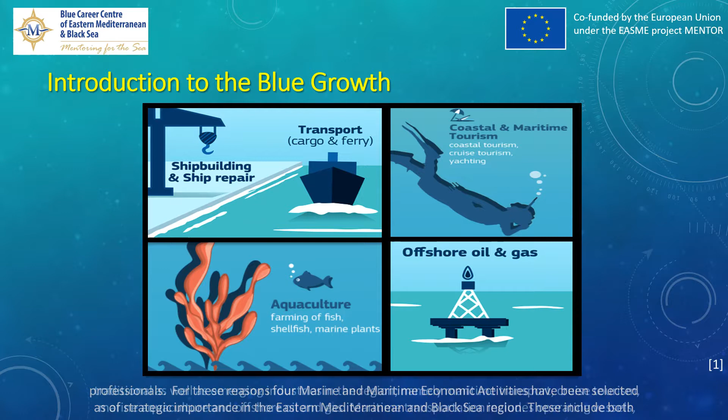For these reasons, 4 marine and maritime economic activities have been selected as of strategic importance in the Eastern Mediterranean and Black Sea region. These include both traditional as well as emerging industries in the region, namely maritime transport, cruise tourism, marine aquaculture, and offshore oil and gas.

Maritime transportation includes operating vessels, shipbuilding and ship repair. Cruise tourism industry consists of cruise lines, travel agents, key suppliers and cruise line partners including ports.

Marine aquaculture refers to the culturing of species that live in the ocean. We consider marine aquaculture that takes place in the ocean, that is in cages, on the seafloor, or suspended in the water column. Finally, the offshore oil and gas industry refers to the development of oil fields and natural gas deposits under the ocean. The majority of oil and gas production in Europe takes place offshore.

As a result, the European-funded Project Mentor is focused on these 4 main sectors.

Oil and natural gas form as the result of the decay of marine organisms on the ocean floor. Sediments, for example clay and mud, are deposited on top of the organic matter, creating anoxic conditions that prevent decomposition. As a result of burial and compaction, the organic material becomes heated and hydrocarbons are formed.

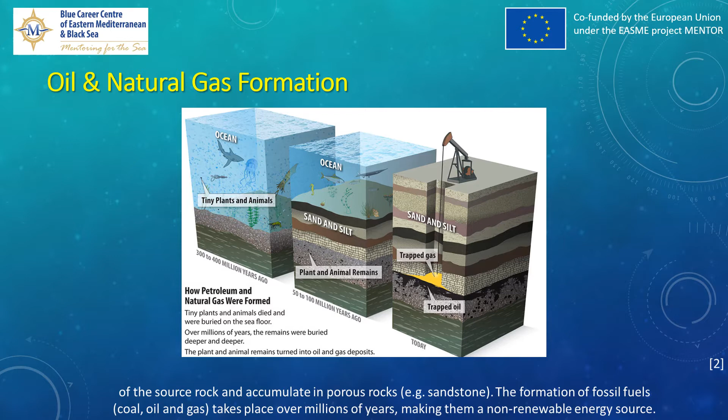The hydrocarbons form oil and gas, which are forced out of the source rock and accumulate in porous rocks, for example sandstone. The formation of fossil fuels, coal, oil, and gas, takes place over millions of years, making them a non-renewable energy source. Globally, we consume 96 million barrels of oil every day. This is the same as 48 supertankers of oil every 24 hours.

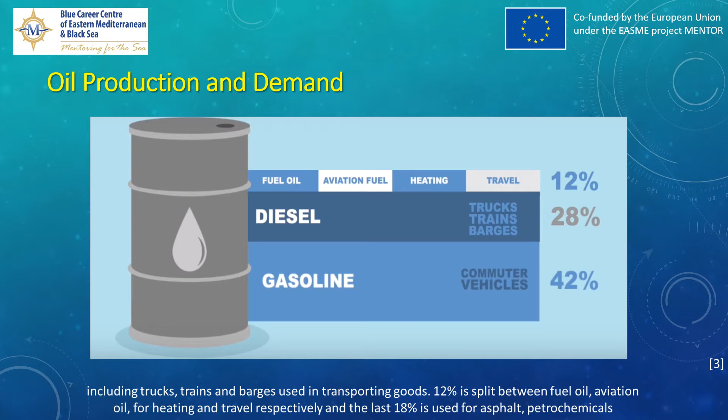So, what is all that oil used for? Well, we as consumers use almost all of it. If you take a barrel of oil, 42% of it will be turned into gasoline for our vehicles, 28% will be turned into diesel, which runs our commercial fleet including trucks, trains and barges used in transporting goods, 12% is split between fuel oil and aviation oil, for heating and travel respectively, and the last 18% is used for asphalt, petrochemicals and plastics.

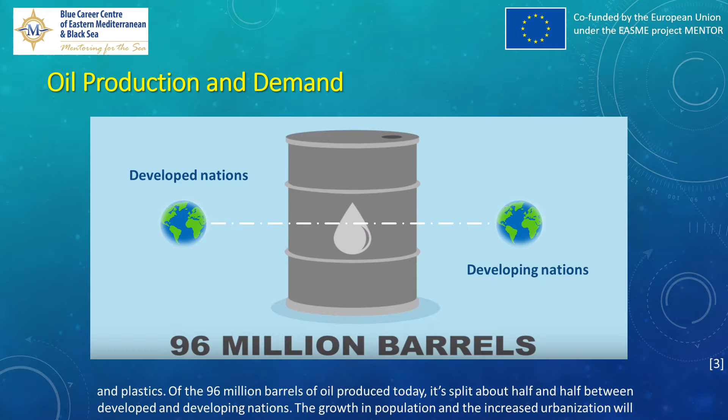Of the 96 million barrels of oil produced today, it's split about half and half between developed and developing nations. The growth in population and increased urbanization will outpace the electric car and energy efficiency for oil consumption, and as a result the global demand for oil will likely go up by another 18 million barrels per day until about 2040, where it is expected to level out and start to decline.

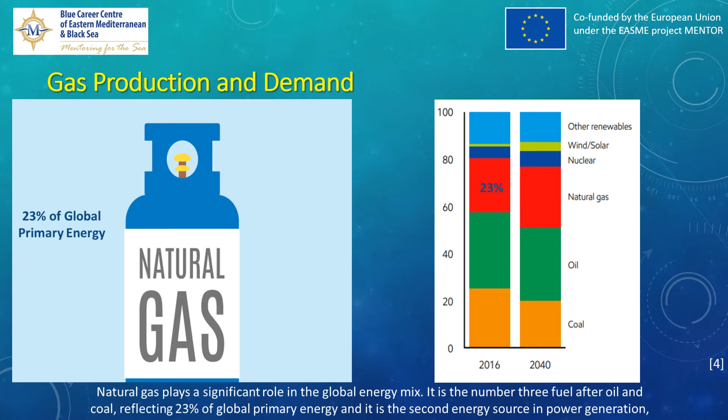Natural gas plays a significant role in the global energy mix. It is the number 3 fuel after oil and coal, reflecting 23% of global primary energy, and it is the second energy source in power generation, representing a 22% share. It is anticipated that in 2040 natural gas will be the second fuel in demand, and its share will be 26% of the energy supply mix.

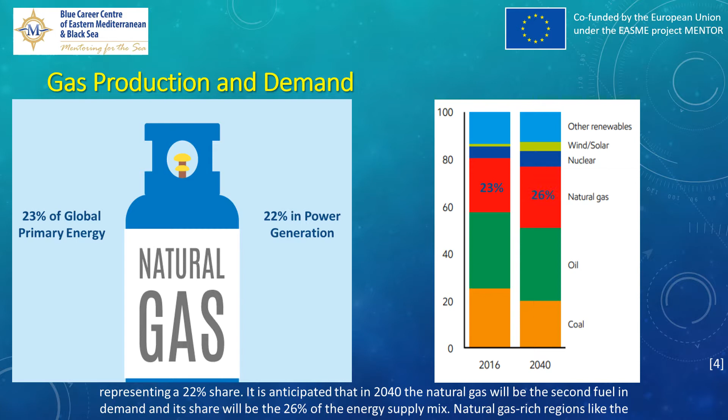Natural gas-rich regions like the Middle East and Russia-Caspian rely on natural gas to meet about half of their energy needs. Abundant unconventional resources prompt North America's steady shift toward natural gas. It also plays an important role in fueling economic growth in Asia, Africa and Latin America.

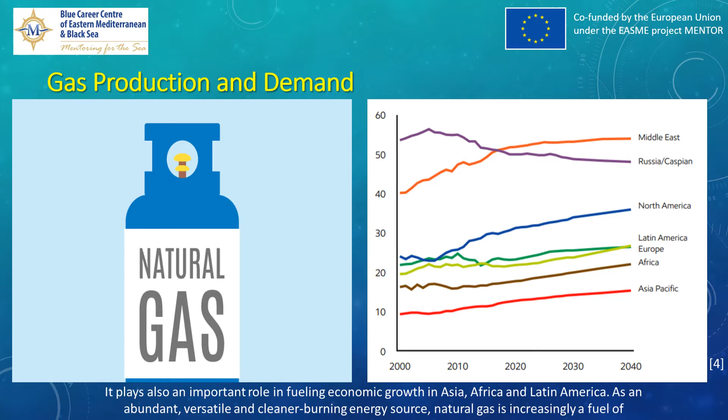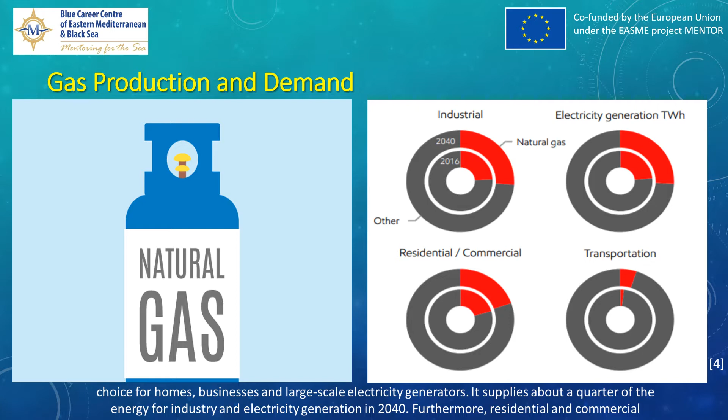As an abundant, versatile and cleaner-burning energy source, natural gas is increasingly a fuel of choice for homes, businesses and large-scale electricity generators. It supplies about a quarter of the energy for industry and electricity generation in 2040. Residential and commercial users continue to rely on natural gas as a convenient, modern fuel for heating and cooking. Finally, natural gas is a small fraction of transportation demand, but sees strong growth in the commercial road and marine sectors.

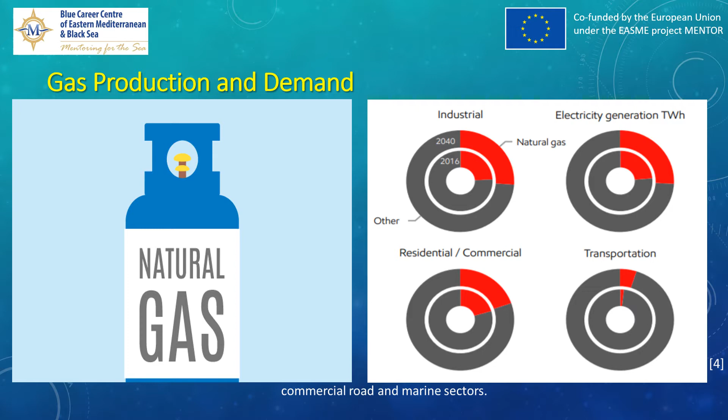The term offshore means off the coast. In oil and gas extraction, offshore refers to the development of oil fields and natural gas deposits under the ocean. Oil rigs are used for the offshore exploration and production of crude oil. Crude oil deposits in the ocean that permit underwater drilling and extraction are developed and exploited using oil rigs. The drilling platforms used for development are subsequently replaced in part by production platforms.

Offshore rigs are also used for the underwater exploration and production of natural gas. In order to develop and exploit natural gas deposits under the ocean, drilling platforms are erected and later in part replaced by production platforms. Offshore drilling began in 1897, just 38 years after Colonel Edwin Drake drilled the first well in 1859, and the first offshore platform was installed in 1947 near the coast of Louisiana in 6 meters depth of water.

Shallow water is defined as water depths up to 305 meters. Deep water is defined as water depth from 305 meters up to 1,524 meters, and ultra-deep water is defined as water depths more than 1,524 meters. The Golden Triangle, Gulf of Mexico, Brazil, and West Africa, is home to primary deep water operations.

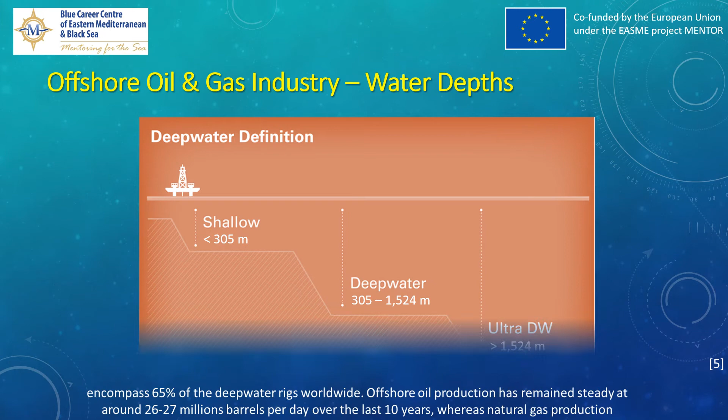In recent years, activity has also expanded to the North Sea. These 4 areas encompass 65% of the deepwater rigs worldwide.

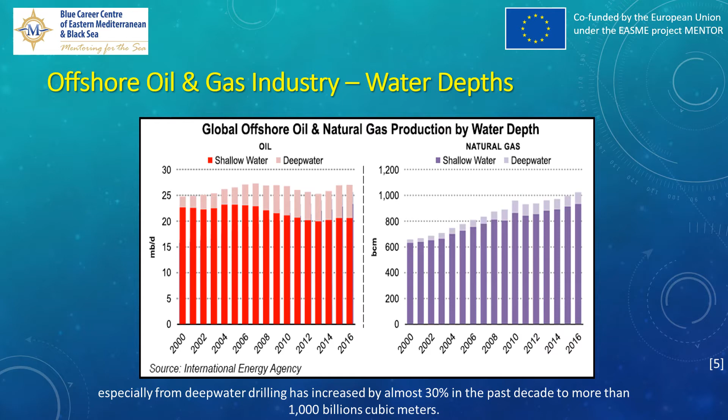Offshore oil production has remained steady at around 26 to 27 million barrels per day over the last 10 years, whereas natural gas production, especially from deepwater drilling, has increased by almost 30% in the past decade to more than 1,000 billion cubic meters.

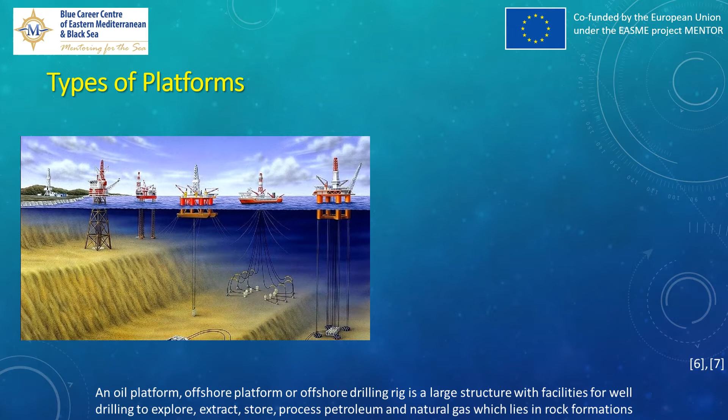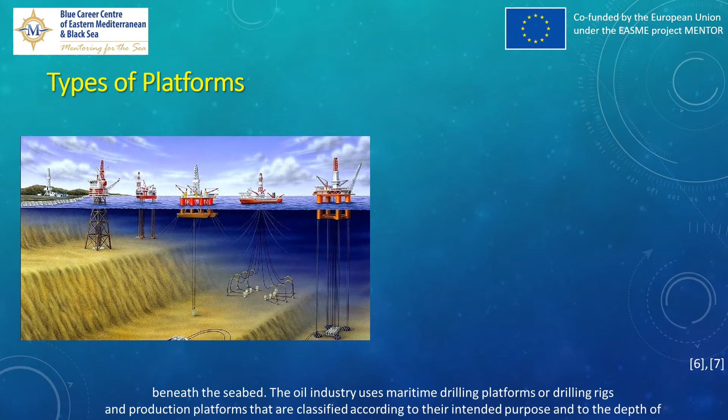An oil platform, offshore platform, or offshore drilling rig is a large structure with facilities for well drilling to explore, extract, store, process petroleum and natural gas which lies in rock formations beneath the seabed. The oil industry uses maritime drilling platforms or drilling rigs and production platforms that are classified according to their intended purpose and to the depth of the water in which they can function. The major types of offshore oil rigs include the following.

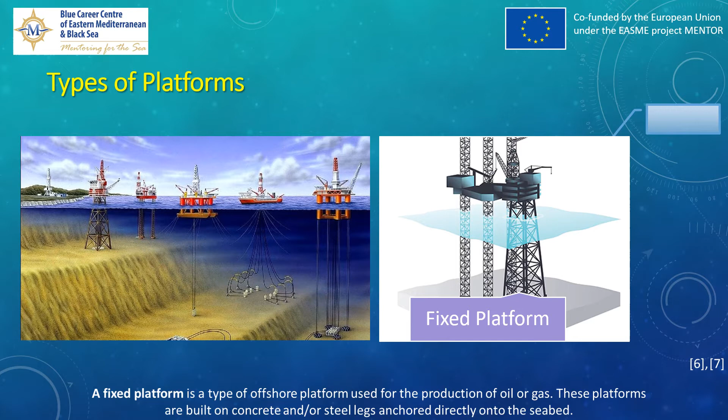A fixed platform is a type of offshore platform used for the production of oil or gas. These platforms are built on concrete and/or steel legs anchored directly onto the seabed. Fixed platforms are economically feasible for installation in water depths up to about 300 meters.

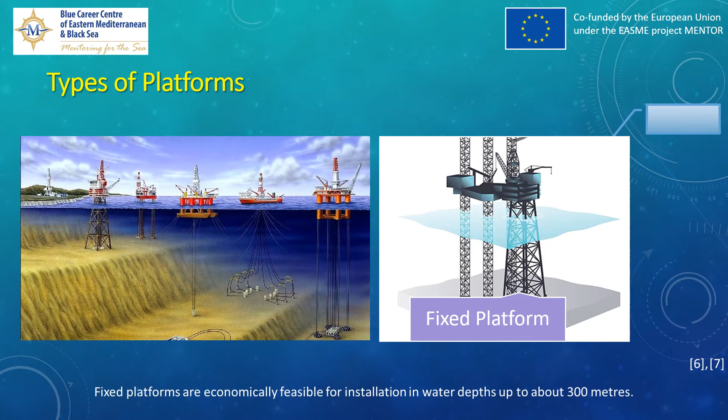A jackup rig is a barge fitted with long support legs that can be raised or lowered. The jackup is maneuvered self-propelled or by towing into location with its legs up and the hull floating on the water. Jackup rigs can only be placed in relatively shallow waters, generally less than 120 meters. In some special cases their operational capability may reach up to 190 meters.

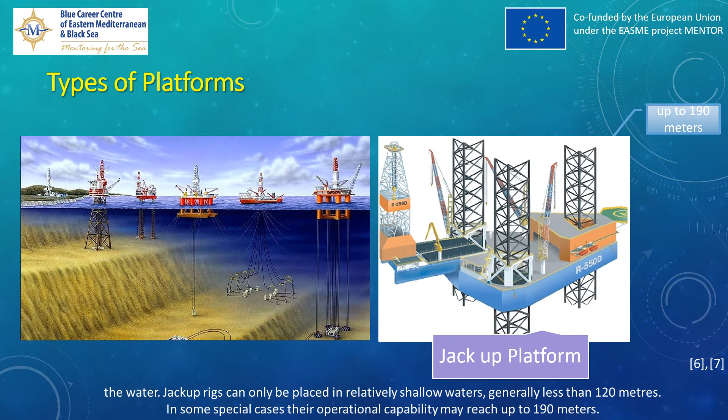Compliant towers consist of slender, flexible towers and a pile foundation supporting a conventional deck for drilling and production operations. Compliant towers are designed to sustain significant lateral deflections and forces, and are typically used in water depth ranging from 370 to 900 meters.

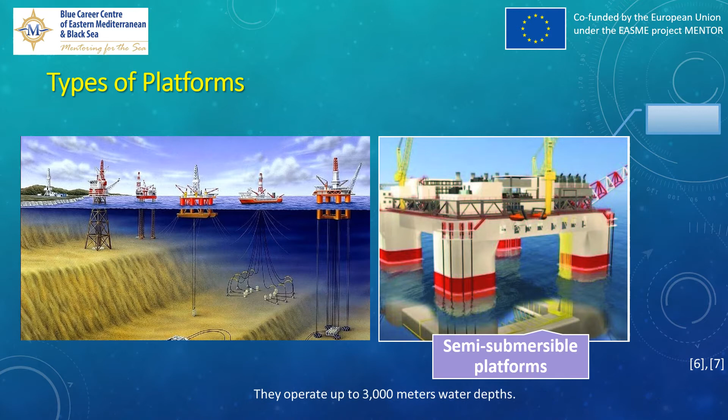Semi-submersible platforms are floating units widely used both in the drilling and the production. Its structure can include one or more decks, which are supported by columns or legs on pontoons. They operate up to 3,000 meters water depths.

Tension leg platforms are an evolution in the concept of semi-subs. The main conception behind its construction is the use of legs as a base, which are secured to the seabed with tethers tensioned in the platform and connected to the legs. These platforms are particularly suited for water depths greater than 300 meters and less than 1,500 meters.

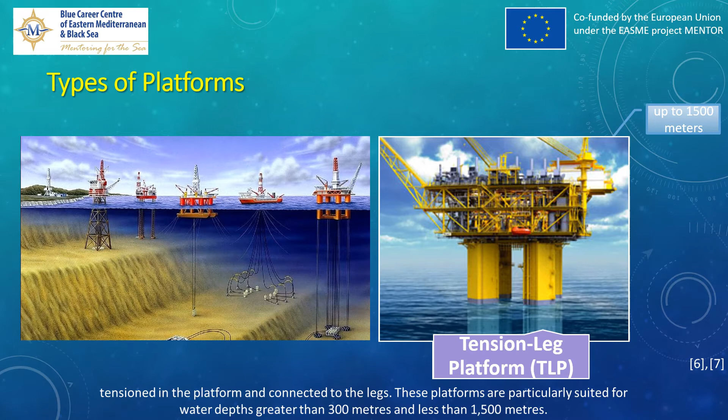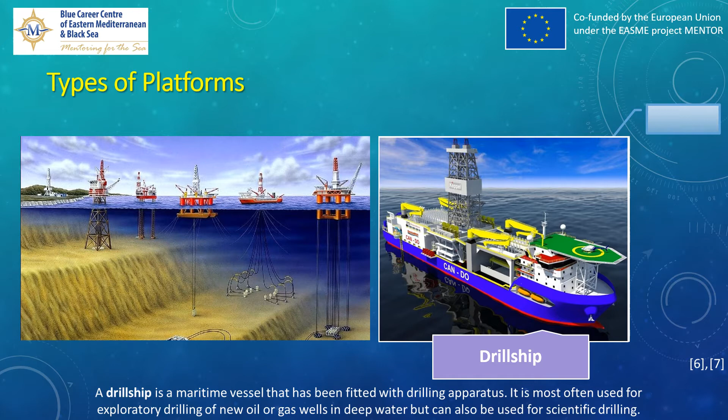A drillship is a maritime vessel that has been fitted with drilling apparatus. It is most often used for exploratory drilling of new oil or gas wells in deep water but can also be used for scientific drilling. Early versions were built on a modified tanker hull, but purpose-built designs are used today. Most drillships are outfitted with a dynamic positioning system to maintain position over the well. They can drill in water depths up to

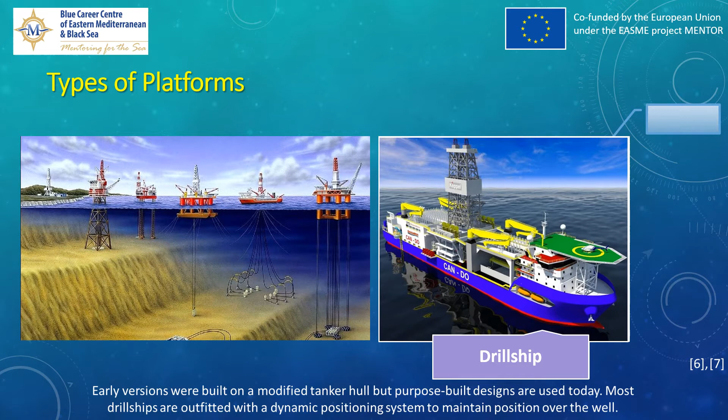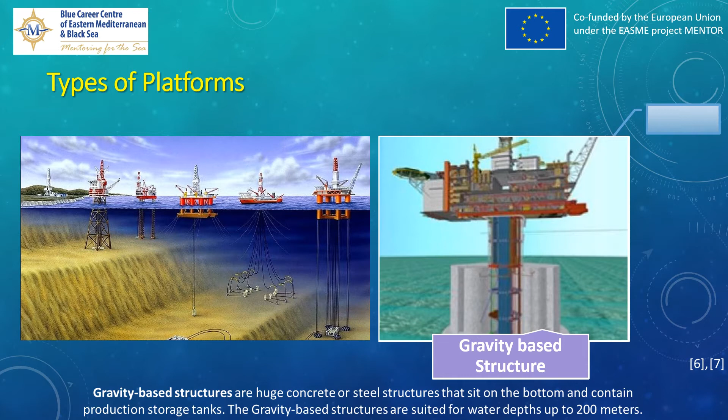3,650 meters. Gravity-based structures are huge concrete or steel structures that sit on the bottom and contain production storage tanks. The gravity-based structures are suited for water depths up to 200 meters.

For drilling wells up to 3,000 meters, naval architects have designed a type of drilling and production platform which has a hollow cylindrical hull that can descend up to a sea depth of 200 meters. These are called spar platforms. This type of platform is secured to the ocean floor by a complex network of cables and tendons.

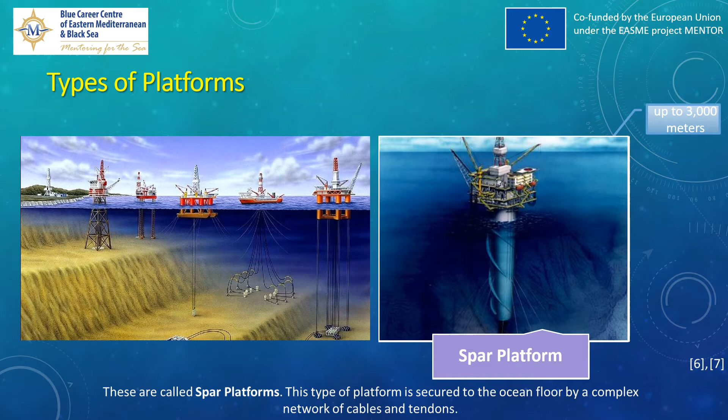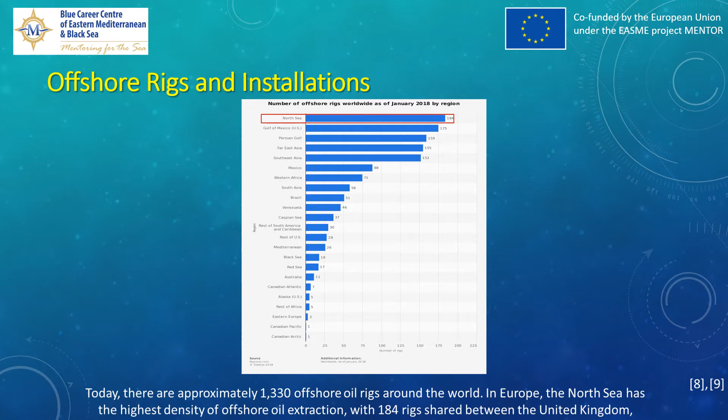Today, there are approximately 1,330 offshore oil rigs around the world. In Europe, the North Sea has the highest density of offshore oil extraction, with 184 rigs shared between the United Kingdom, Germany, Denmark and Norway.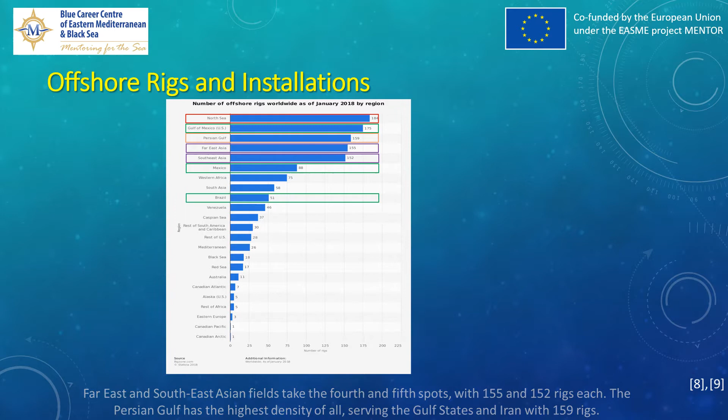Currently there are more than 600 platforms, not counting the large number of subsea structures connected to them, operating in the continental shelves of the European member states. In the North Sea, hydrocarbon offshore production takes place in the Danish, Dutch, German, Irish, Norwegian and UK sections.

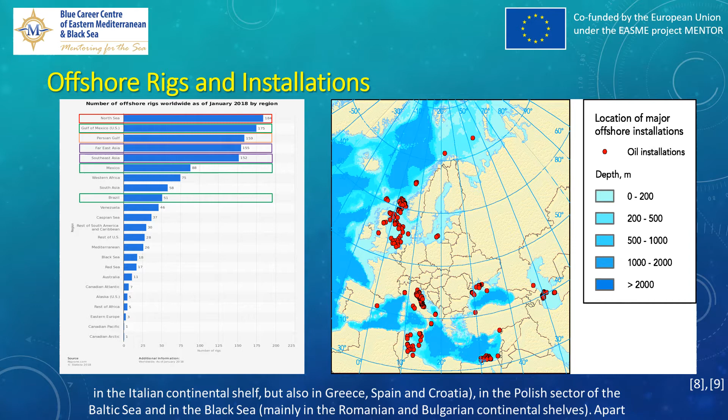Offshore production is also taking place in the Mediterranean, mainly in the Italian continental shelf, but also in Greece, Spain and Croatia, in the Polish sector of the Baltic Sea, and in the Black Sea, mainly in the Romanian and Bulgarian continental shelves.

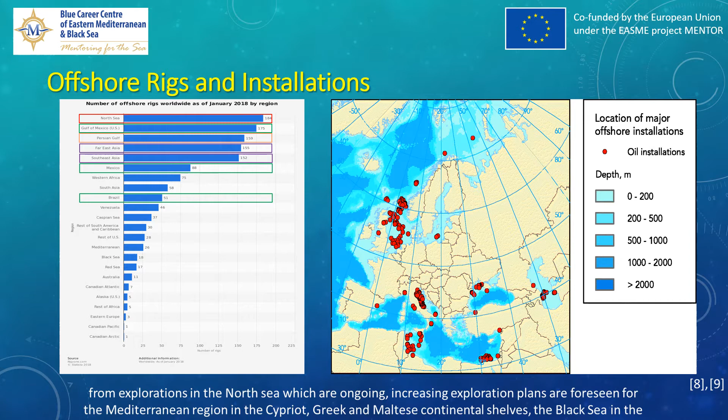Apart from explorations in the North Sea which are ongoing, increasing exploration plans are foreseen for the Mediterranean region in the Cypriot, Greek and Maltese continental shelves, the Black Sea in the Bulgarian and Romanian continental shelves, as well as for the Atlantic east coast in the Portuguese continental shelf.

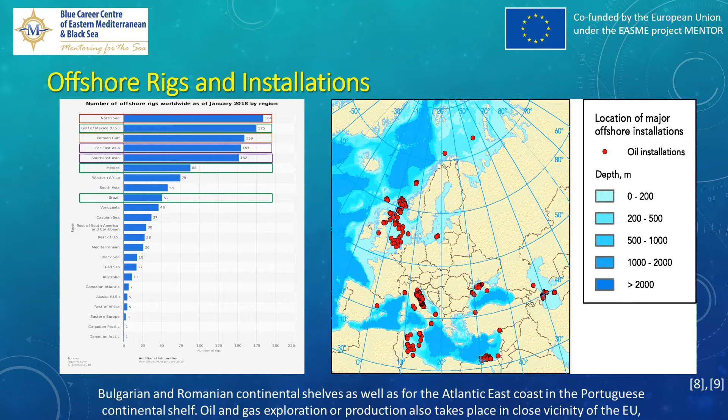Oil and gas exploration or production also takes place in close vicinity of the EU, off the coasts of Algeria, Egypt, Israel, Libya, Tunisia, Turkey and Ukraine.

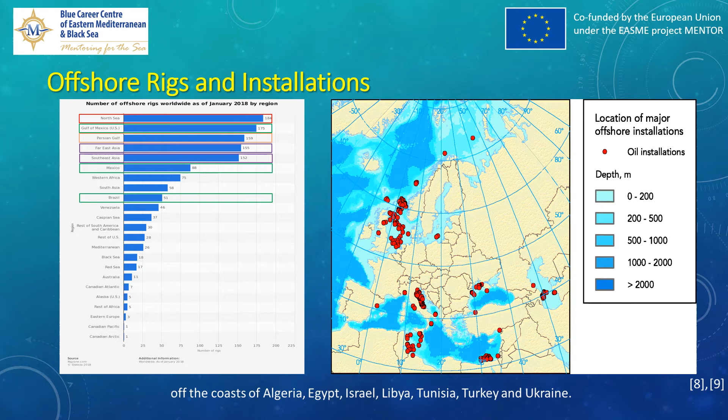In the context of the Mentor project, a total of 119 questionnaires have been collected and statistically elaborated. They represent 4 countries: Bulgaria, Cyprus, Greece, and Romania. The aim of this analysis was to determine the required academic qualifications, technical skills, behavioral competencies, as well as the professions with the highest demand in the offshore oil and gas industry. The questions were divided into 2 sets.

The first set of questions referred to the current trends and needs within the industry, whereas the second referred to their future analogs. Since the target group of this e-learning course is students, the presented results refer to the future identified gaps and trends of the offshore oil and gas industry.

Academic qualifications are the degrees and diplomas that an individual has acquired, whether by full-time study, part-time study, or private study, whether conferred in the home country or abroad, and whether conferred by public or private educational authorities.

As far as the necessary academic qualifications are concerned, all gathered data regarding tertiary education were collected and grouped based on relevance. As a result, 11 main categories of tertiary education degrees were identified in the questionnaires, namely: naval architecture and marine engineering, civil engineering, mechanical engineering, computer science, economic studies, chemical engineering, environmental engineering, geology, human resources, medical studies, general academic qualifications, and other specialization courses or lower-ranking crew.

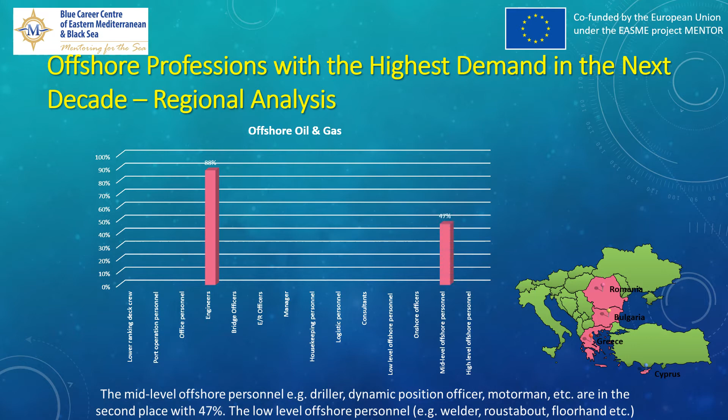The mid-level offshore personnel, for example driller, dynamic positioning officer, motorman, etc., are in second place with 47%. The low-level offshore personnel, for example welder, roustabout, floorhand, etc., and the high-level offshore personnel, for example tool pusher, senior dynamic positioning officer, subsea supervisor, etc., are located in the third spot with 35%.

The future demand of the other profession categories fluctuate between 6% and 24%.

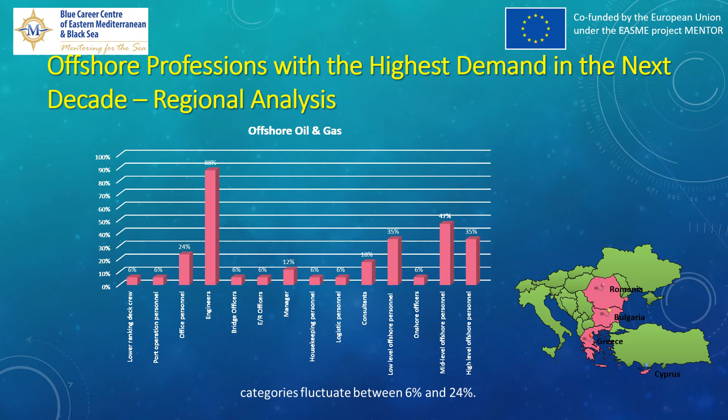No matter where the oil rig is located, it operates 24 hours a day, 7 days a week, no matter what the weather is like. This means the hours are long and the conditions are sometimes very dangerous for the people who work on the rigs. Advances in oil drilling mean many of the tasks are automated, but there are still plenty of very physically demanding aspects of the job.

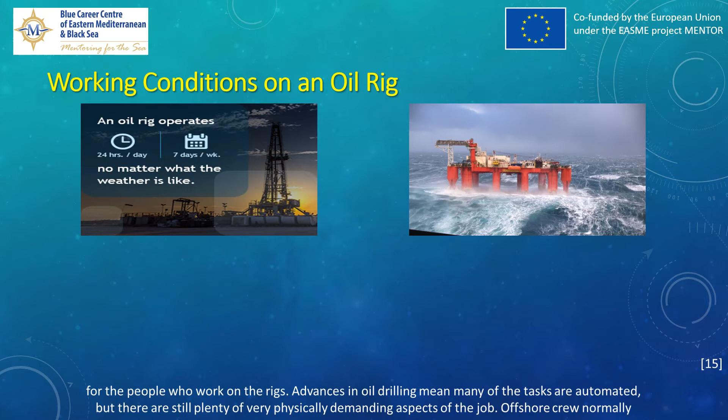Offshore crew normally works in 12-hour shifts. Usually, they work offshore for 14 days followed by a rest period onshore for the next 14 days. They are well trained in safety and environmental regulations to ensure the safety and protection of oil rigs and the people working there.

Offshore occupations include different levels of employment in the fields of production, drilling, rigging, surveying, piping, welding, diving, quality checks, as well as in health and safety, cooking, and support staffing. In the next 10 minutes we are going to get familiarized with some representative offshore professions.

Roustabout is an entry-level worker, low-level offshore personnel who only meets very minimal job requirements and can be compared with a deck cadet on a ship. Basic school education as per local legislation is the only essential requirement. Many people selected as roustabouts have manual labor or technical experience, such as working as a mechanic or in construction.

Roustabouts who work on an offshore rig may have the following assigned tasks and duties: rig platform cleaning and repair, machinery and equipment maintenance, and handling cargo delivered by ships and helicopters. This position comes with an average salary of about €32,000.

The driller is responsible for supervising and carrying out the drilling and well control and other work in connection with the drilling operations. He or she must ensure a safe operation of the drilling control system, pipe handling systems, mud circulating systems, and blowout prevention equipment in accordance with the requirements specified in the operating procedures. This position comes with an average annual salary of about €50,000.

If you would have asked me 3.5 years ago what I would be doing, I would have never said oil and gas. I knew I wanted to do engineering. I love math, I love science. The ability to be in the field and to be hands-on was really important to me.

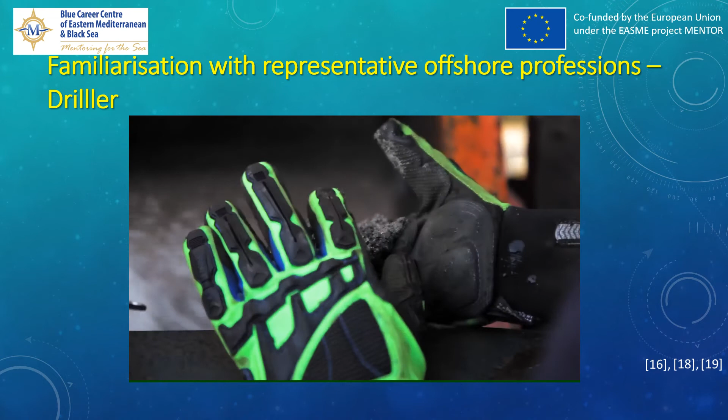Instead of going opposite directions, they'll be parallel. Oh, really? I've been with Shell for 3.5 years and I learned something new every day. I was given a rig within my first 3 months of working at Shell. Of course, I had my mentor there with me, and that really helped me feel comfortable in my work environment. I don't know many other professions or many other companies that would give somebody so early in their career so much responsibility. It helps you grow very quickly.

One thing I love about Shell is the training that you get. Drilling engineers, geologists, petrophysicists, we all come together and learn about the business as a whole. Everything I do is a team decision. It requires me to reach out to other people to make that happen. The connectedness of the company, and we're all shooting toward a common goal, is just amazing.

My name is Anna Flanoy, and I am a drilling engineer. When I tell people what I do, they don't believe me, but it's fun.

I love it. The crane operator is responsible for the daily operation and maintenance of the cranes, and in addition to this, manages the roustabouts. He or she supervises that all activities are carried out in accordance with the barge engineer or assistant barge engineer's instructions, and delivers essential on-the-job crew training within lifting and slinging. Furthermore, the crane operator functions as the helicopter landing officer in connection with helicopter operations. This position comes with an average annual salary of about €55,000.

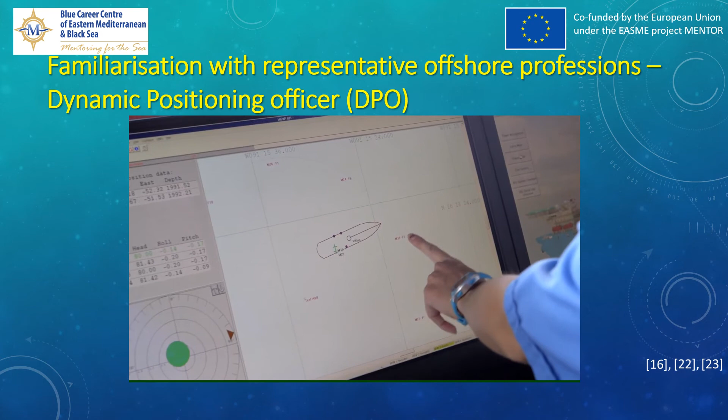Jessica is in control of powerful thrusters when she is working as a DPO on the bridge on the ultra-deepwater drillship Maersk Viking. A DPO basically keeps the vessel in position on its dynamic positioning system. We're monitoring that. The ship isn't allowed to move, even in high seas and strong winds. Well, the rig needs to stay within a meter of its set point.

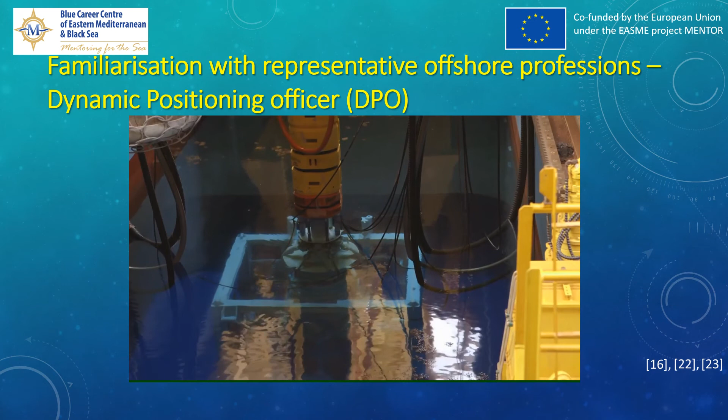The Maersk Viking is currently on contract in the Gulf of Mexico. The drilling can be done at even very deep water depths. Maersk Viking is capable of drilling in 3,600 meters of water, equivalent to 12,000 feet.

Communication is number one on board. We have to make sure that we can maintain position. We have to maintain constant communication with the drillers while they're going down the hole. And we have to maintain constant communication with the engine room to make sure that we have enough power to stay on location while they're drilling. Maersk Viking is a state-of-the-art drill ship, where safety has the highest priority. The equipment is state-of-the-art, advanced. It's impeccable.

The subsea supervisor is the head of the subsea section and overall responsible for the safe testing, installation, and operation of the subsea blowout preventer and control system. The subsea supervisor is additionally responsible for the installation of the marine riser system, including the heave compensating equipment. This position comes with an average salary of about 100,000 euros.

My name is Mick Hall. I'm the subsea supervisor on board the Maersk Viking. Mick Hall is in charge of anything involved with the subsea department on the new ultra-deepwater drillship Maersk Viking. At the moment, we are rigging up to run the BOP for the first time. Mick has the overall responsibility for the safe testing, installation and operation of the subsea blowout preventer, the so-called BOP, and the control system. The importance of this job is very, very high.

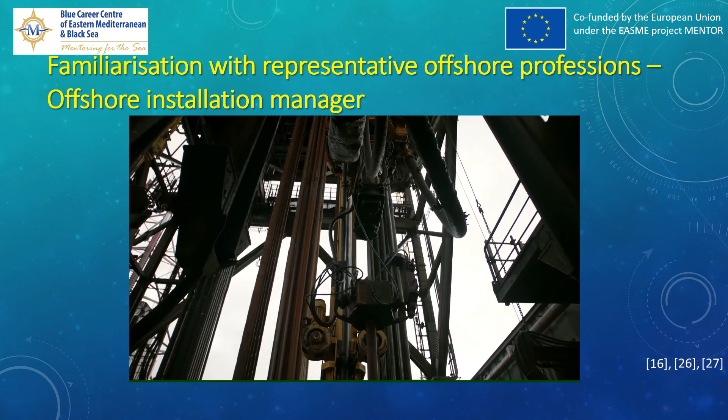My responsibility is the safety of the crew and the unit, that everybody gets home in one piece, the way they came out. I care for my job and I also care for my colleagues, and to ensure that we have a good relationship with our client.

It's a big part of our life to be out here, and we need to be in a good atmosphere, it's sort of the second family. When I go to the rig, I have the feeling that I want to go there. I do it because I like it, that's sort of the driver. And we're in a competitive job. We like to drive it to the edge, and that is what's sort of the good challenge for me.

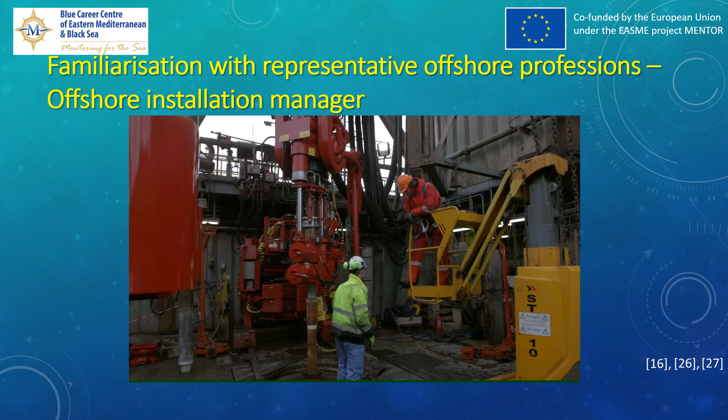The Maersk Resolute is a jack-up. It's purpose-built for drilling new oil wells, new gas wells, and the whole setup, the whole technology is made for drilling new wells. That's our primary objective, what we're very good at.

To give you an idea about the size, the rig itself is 70 by 70 in a triangle. We got 3 legs, each 130 meters long. The elevated weight when we are operating is between 15 and 16,000 tons. The derrick is 60 meters high, and we can drill as far as 8-9 kilometers depending on the conditions. So all in all, a big piece of equipment and toys for big boys.

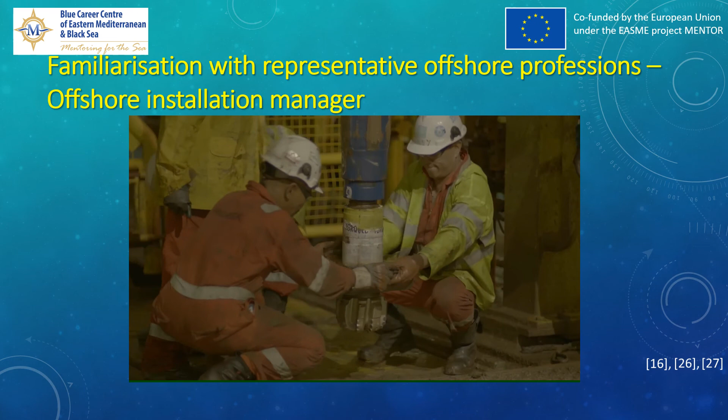It's always exciting when we do exploration wells to hit the black oil. Even though it's the client's oil, it's always a success for us when we hit the bullseye. And that's a good result for the client, because when the client is successful, we are successful as well.

The career mentoring process can be considered a valuable tool which will assist in discovering the student's potential and aptitude, and accordingly suggest the right career path. There are students who are either confused or uncertain about their employment preferences. Moreover, there are students who, despite having a clear idea of what they want to achieve in life, do not know the path they need to follow or the requisite academic qualification. In addition, some students might also have preconceived beliefs about certain professional fields.

The ultimate objective of the Mentor Project was to develop a framework to provide career guidance and occupational orientation not only to students but also to existing graduates and professionals, and to increase their awareness and properly inform them on job opportunities and relevant prospects in the blue sectors by selecting the proper path.

In the context of this e-learning course, the presented framework is adapted to the students. The aim of this framework is to present to the students the opportunities and the required technical skills and behavioral competencies for future employment in the offshore oil and gas industry, and to provide them viable educational option paths.

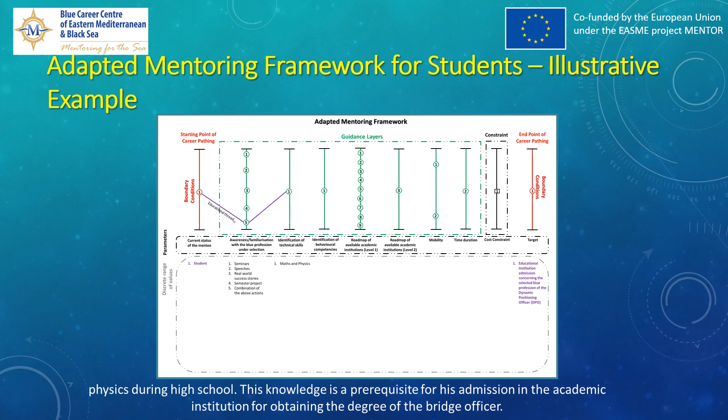The next step of the mentoring process refers to the identification of the necessary technical skills of the student. The student should have a good knowledge of maths and physics during high school. This knowledge is a prerequisite for his admission in the academic institution for obtaining the degree of the bridge officer.

Subsequently, the identification of the required behavioral competencies follows. The student should develop teamwork and problem solving through the assignment of group projects in high school. The next step includes the mapping of the available educational institutions for this profession.

The mentoree has expressed his desire to study in his country Greece and not abroad. This initial constraint leads to the recording of 9 available merchant marine academies in Greece for the profession of the bridge officer. Only one merchant academy is located near the residential area of the student, whereas the remaining 8 academies are established in different towns.

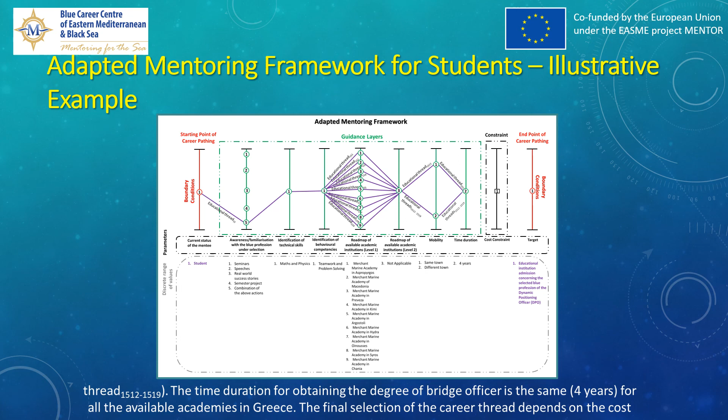The time duration for obtaining the degree of bridge officer is the same, 4 years, for all the available academies in Greece. The final selection of the career thread depends on the cost constraint that is inserted in the framework by the applicant. In this scenario, the student decides to follow the most cost-effective educational path.

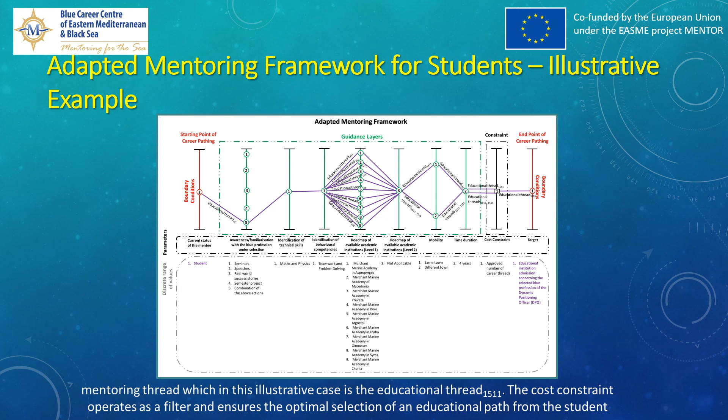This process leads to the final selection of the mentoring thread, which in this illustrative case is the educational thread 1511. The cost constraint operates as a filter and ensures the optimal selection of an educational path from the student by taking into consideration the economic affordability of his/her family.

At this point, the e-learning module for the familiarization of students with the offshore oil and gas industry has come to an end.